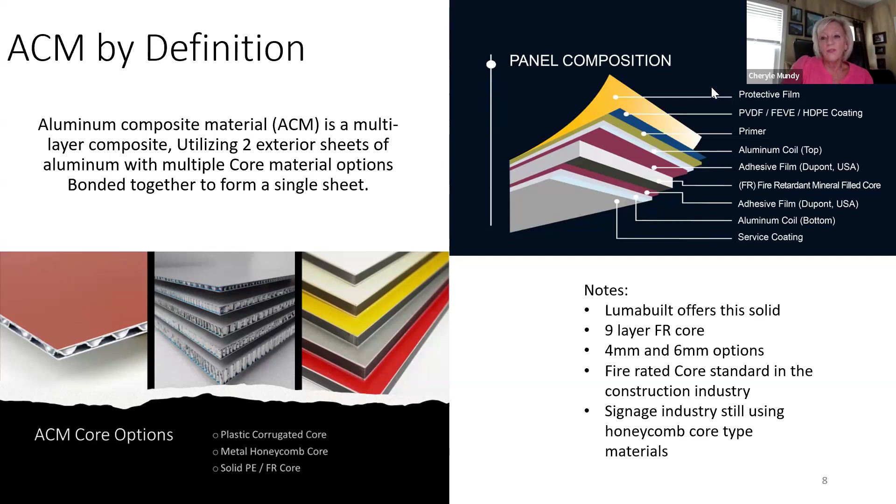There's a lot of different options for ACM. You'll see there are wood grains. There are a lot of different color options. There's metallics and micas as well.

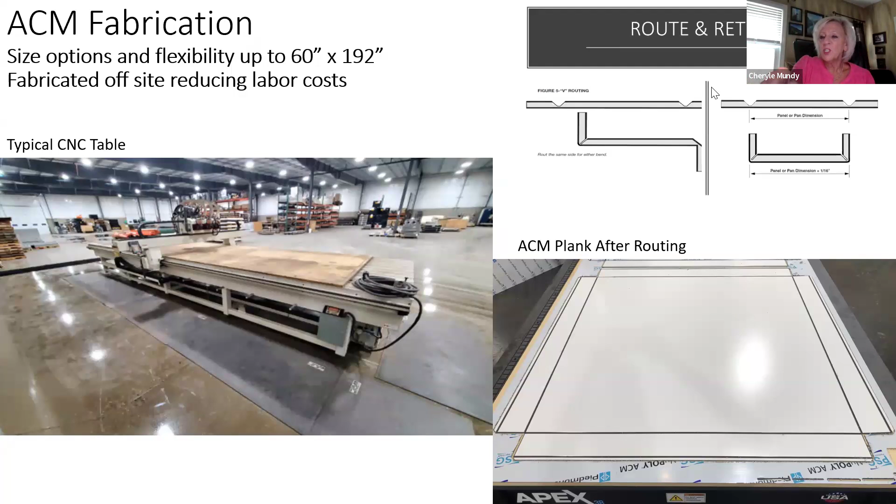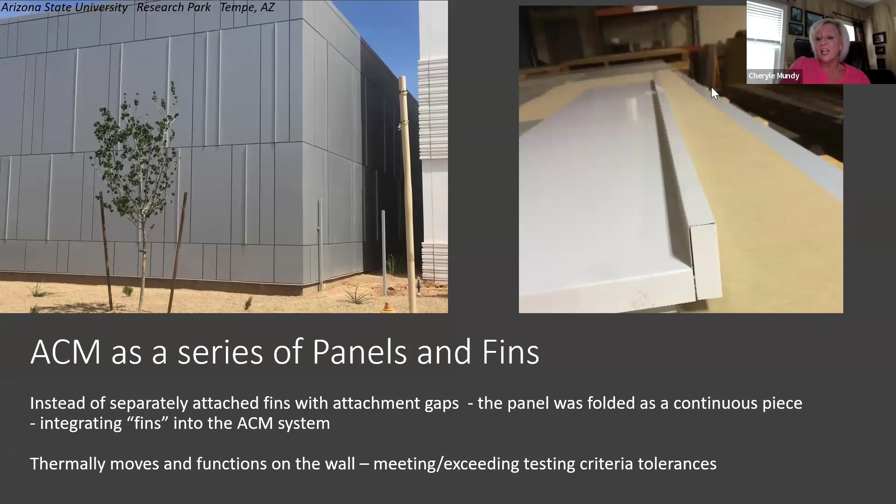However, on the left side, you can see it's been returned one way, and then the other end has been returned a different way. What that would allow you to do is incorporate fins as an architectural interest on a building. The great thing about that is it's one consistent piece, so you're not having to worry about adding a different element that could potentially loosen up over time as the building thermally moves, contracts and expands.

Sometimes you'll see white tile that has white grout, and sometimes you'll see white tile that has black grout. It just allows it to pop a little more. So it's kind of that concept, but it's just something to keep in mind, an inexpensive way of being able to provide architectural interest. We can do that for you.

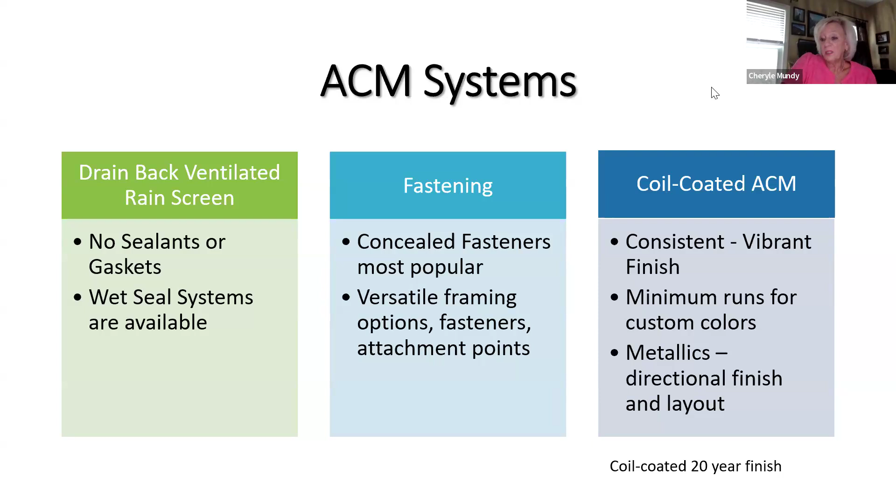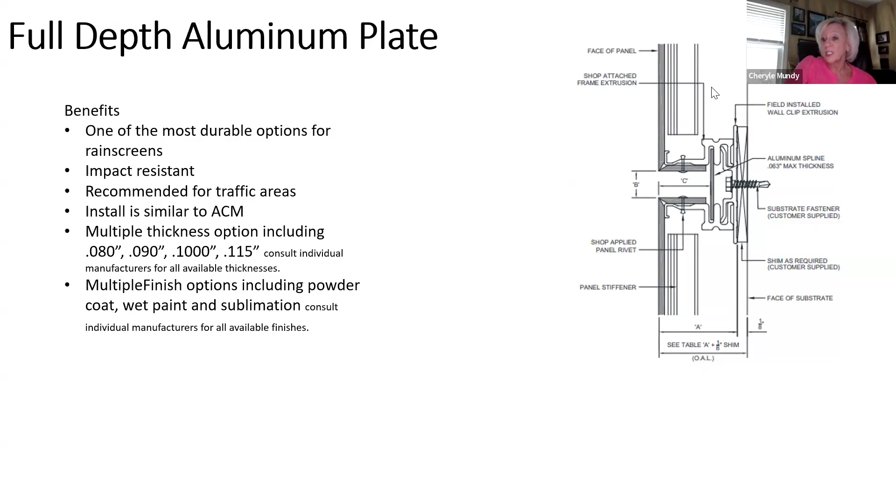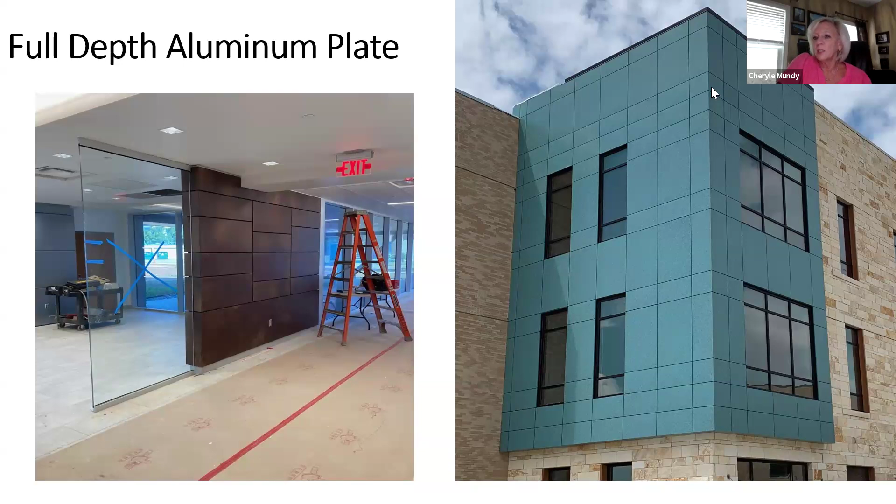Now, I mentioned mosaic. Mosaic, again, is our planks and our batten. What we do is use what I was mentioning a minute ago, our sublimation process. It's a powder coated sublimation process, where we reproduce a pattern or an image using a heat transfer film. So anything that we're going to sublimate is going to be powder coated first, and it's going to have that film wrapped airtight around it. It goes into an oven and it turns that ink on that film into a gas that attaches to the powder coating.

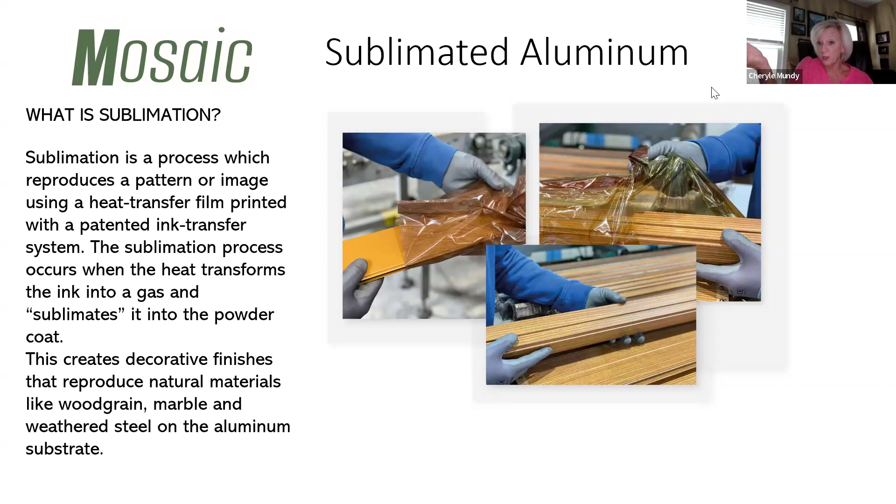It provides us a means of creating decorative finishes, so we can recreate patterns like wood grains, marbles, a weathered steel like I mentioned, anything like that onto extruded aluminum. It's a very cool process. The key thing is anything that we're going to sublimate has to be able to withstand 392 degrees without deformation, because it takes that temperature to turn that ink on that film into a gas that attaches to the powder coating.

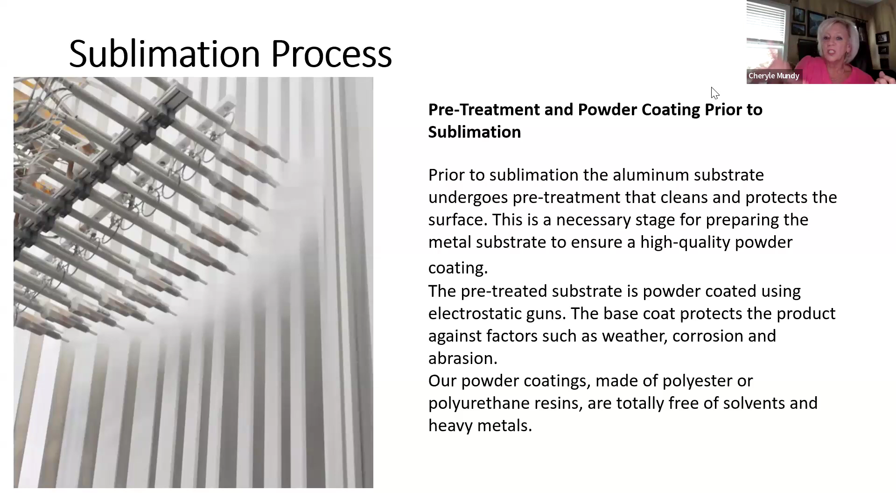And here again, you can see at the top left, that plank is now gold. It's not silver any longer because it's been powder coated. And then you can see the film is getting ready to be wrapped around it, and it's a wood grain. If it's a light film, we're usually going to have a light powder coating. If it's a dark film, we'll usually have a darker powder coating. So it gets wrapped airtight around there, and then it goes into this oven. Now, this oven and the films are from Italy, from a company called Decoral.

You want to make note of this because you'll see on our website, and I'll show you when we're done, our chip set of our standard finishes. A perfect example is I'm working on a project in Florida where they wanted a concrete look. Well, concrete's not a standard look, but you can go to Decoral and they have hundreds of finishes. So say you were looking for a marble or the concrete look, you can go on their website, go to Decoral USA, and you can see all the different finishes they have.

So if you don't see what you need from our chip set, our standard colors, you can go there and we can request 2 or 3. They get a little upset if we get too many involved. So I requested 3 for this project and they selected a concrete look that they wanted. So we don't need to reinvent the wheel. However, we will match existing materials. If you had something you need to match, you can send us a sample and we will have them match it for you. So anyway, it goes into this oven.

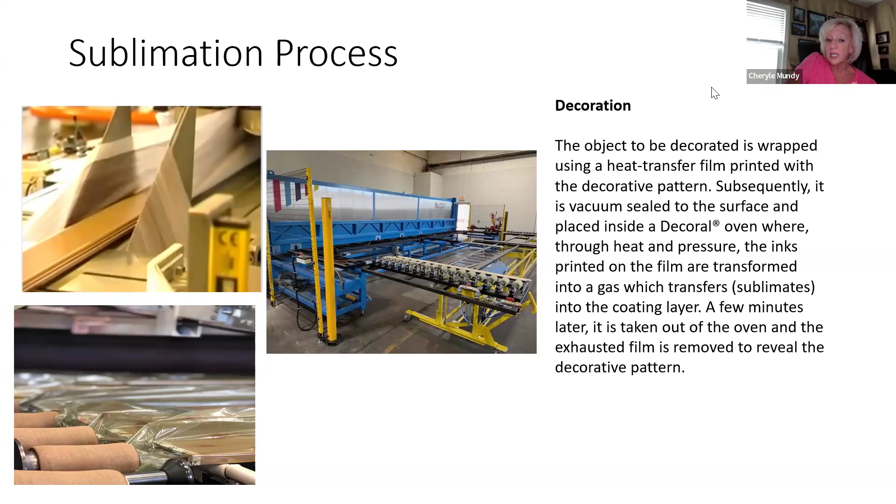And then what you end up with from Lumabuilt, I needed to add this. I did it on my other presentations. I haven't done this one in a while, so I apologize. But we now offer a 2.5 inch, a 4, 6, 8, and 10. We had a client last summer that had a huge project with ACM and battens, but they had to have a 2.5 inch plank. So we made the form and made it for them. We will do customs if it makes sense. We're not in the business of losing money. So if it's something that we can do and it makes sense for everybody, then we will certainly do it for you. So we now, like I said, offer a 2.5, 4, 6, 8, and 10.

Now the 2.5, 4, 6, and 8 are all the same price. The 10-inch goes up about $1.50 a square foot. So bear that in mind if you're ever looking at the 10-inch. You can mix the sizes together. They're all a standard length of 24 feet.

We do have trims and extrusions available. Our trims and extrusions are sublimated extruded aluminum, just like the planks and battens. So the trim's going to match exactly. And I'm focusing on that because I've had quite a few firms that I've been at saying, oh, we use this product, but their trim was awful. It looked like it was painted or it looked like it was plastic. So just keep that in mind. You will not have that issue with our products.

We also offer battens that range anywhere from a 1x3. We now have included up to 2x12. They can be installed vertically or horizontally. They are available in a 1 and 2 piece. They are also 24 foot in length. And like I said, you can do wood grain, solid colors, patterns, anything you can think of on these planks and battens.

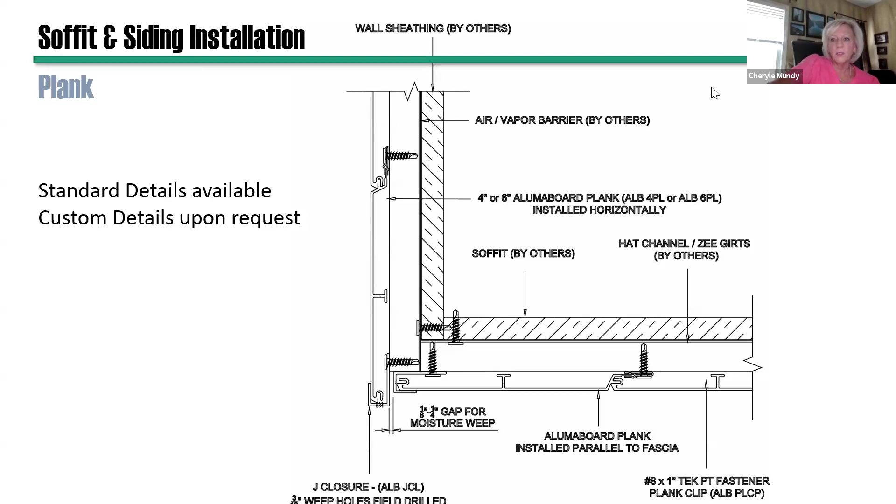It's a horizontal installation. We have an installation guide. We have all types of stuff to help out. And this is our clip system. It's proprietary to us. We have a patent on it. It's stainless steel. It's not plastic. It's not going to rust. So it is very high quality. And then you can see where it says clip ALB PLCP. You can see there where it allows for some movement.

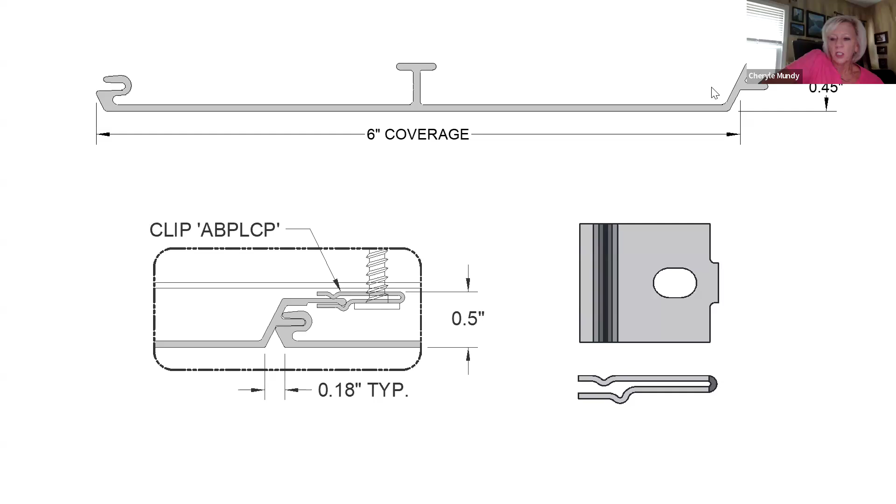I mentioned that the planks are 24 foot in length, and I've had folks express concern about buckling. That's not going to happen. That clip does allow for some movement, but our trim does as well. It's like installing tile or wood. You don't ever install it up against the wall. That's why we have shoe mold and cove base to hide that gap to allow for contraction and expansion. And it's the same concept in our trim. So you don't have to worry about that. Here are some basic trims that we offer: a J closure, different end caps.

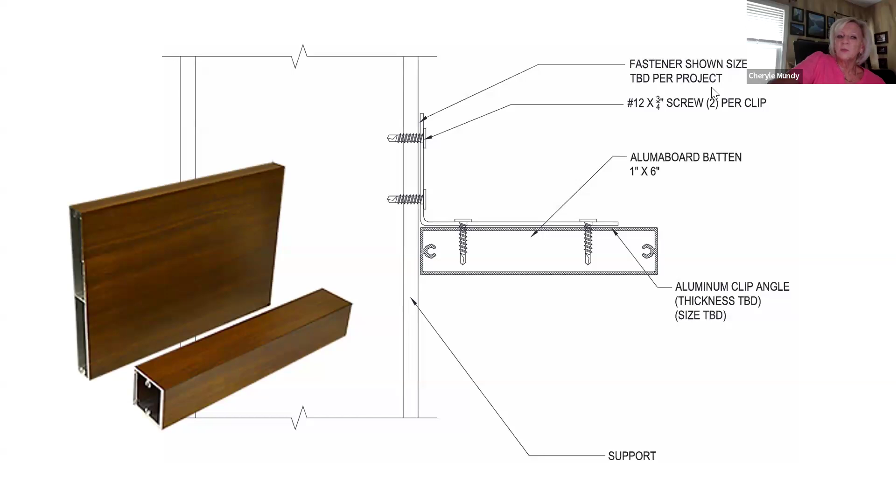So I mentioned we have battens. Now we do offer them. They have unsurpassed aesthetics. They are offered in a solid or two-piece, as I mentioned earlier, again, 24 foot in length. You can mount them vertically or horizontally. Just bear in mind they are architectural, they're not structural, so they would need to be attached to a solid structure, as you see here. Now, if you have a situation where you can install a batten like you have here and you don't see the attachment, then that's when you would want to consider using a solid batten. Here's a good example of an installation.

Now, if you had a situation where you're going to need to install it and you would see the attachment, then we have a two-piece batten. And when we're done, I'll show you how that works.

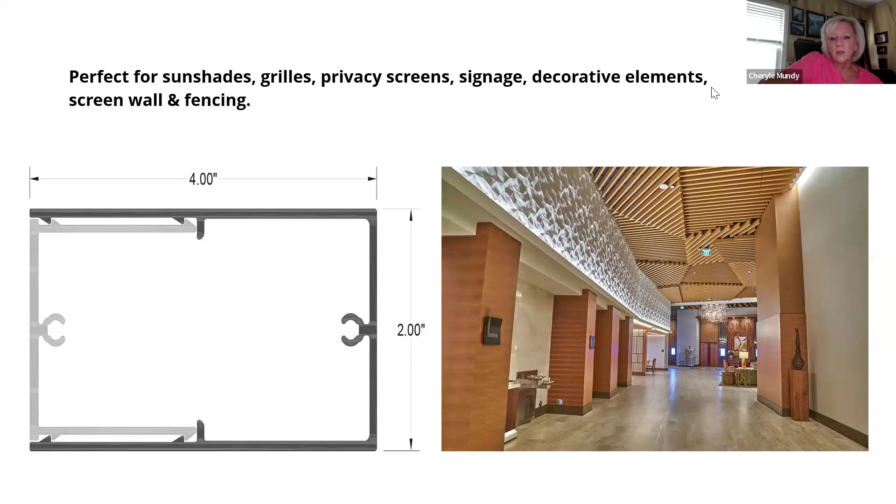And a few slides ago, you saw a bunch of battens on the ceiling, 3 or 4 slides ago. Well, this is the project. It's a JW Marriott, where they continued the look into the interior. Like I said, it's Class A fire rated, so you can install it on an interior. The great thing about this project, what just popped up here? Sorry. There's ACM on this project, there are battens on this project, and there are planks on this project, and we provided all of that material for this project. So it made their lives a lot easier.

I'm telling you, when you can pass off a job, if you got 3 or 4 different aluminum products on a project, it's a lot easier for the GC to deal with one person from a scheduling perspective. They're going to get a better price, a bundled price, and they're going to get a much better freight rate. So those are just things that you may not have thought of, but you might want to consider it. It will make their life a lot easier. And 99% of the time, you're going to get much better pricing to help keep what you specified in the project.